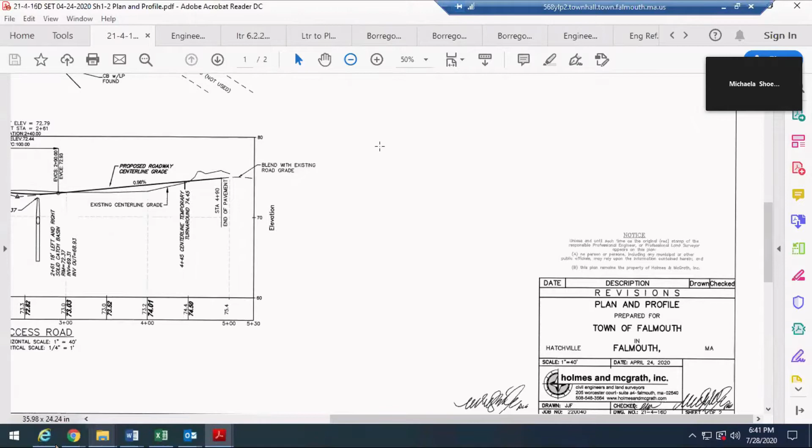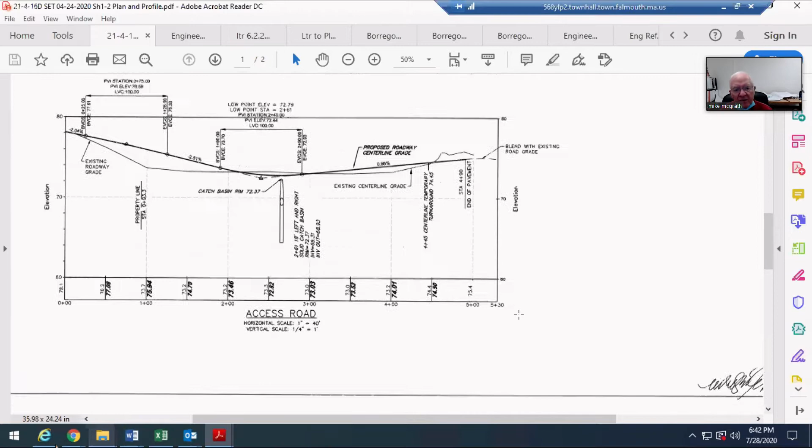What exists today is, I don't know if you can see my arrow, but the pavement of Locustfield Road actually is on the westerly portion of the layout in front of this site. Since this is an active sand and gravel pit, there are 10-wheelers and trailer dumps that travel up and down this road. There is an existing paved entrance that goes in a ways. And what this plan shows, if we get down to the profile, we're showing that if you look, there's a property line and there's an existing roadway that's been there for, I don't know, since the mid 80s.

But we've agreed to remove and dispose of that pavement, and this heavy line is the new proposed pavement that's going to be constructed on the road. There is going to be a low point that's shown where these two dark squares are, and there's a set of catch basins there that lead to a leaching basin. The leaching basin sits in the midst of basically a man-made depression. We have filed with the planning board drainage calcs that show that the drainage system is sufficient.

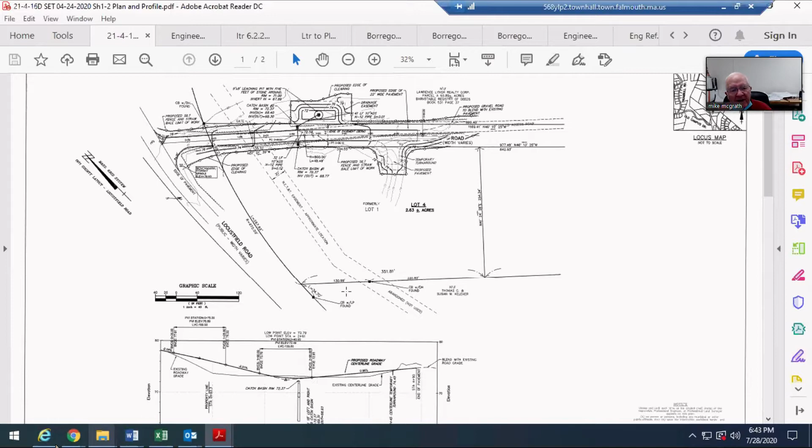The soils that exist there are obviously sand and gravel because it's been mined for, as I said, probably 40 years. So one of the things that has come up in the review, and we've already presented this one, but there turns out to be a legal problem with the previous hearing, was we asked for certain waivers. The first waiver we had was there's insufficient distance between this center line and the center line of where Locustfield Road comes in. The required distance is about 300 feet, and what there is, is about 100 feet.

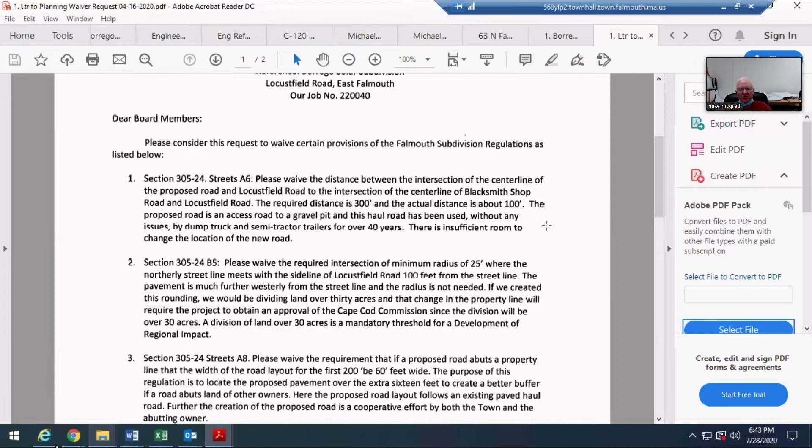And as I said, the project has been used without any accidents for over 40 years. It's been actively used as a haul road. So there's insufficient room to change the location of the road, so we asked the board to waive it.

Then what happens is if we go back to the subdivision plan, what we asked for was that we don't have the required sideline radius at the northerly side of the proposed road and the easterly sideline of Locustfield Road. Your subdivision regulations require a 20-foot rounding, 25-foot rounding.

One of the reasons we don't want to do that is if we touch or alter or divide any portion of this Lawrence Lynch Realty Corp land, we have to go to the Cape Cod Commission, and we don't want to do that. Obviously there's a public benefit here because if we construct the road, the town gets to use this road for whatever services they want on lots 4 and 5.

Then there's a regulation that says that if a road abuts someone else's land for the first 200 feet, it's supposed to be 60 foot wide, and then the pavement is supposed to be shifted over. We've asked you to waive that because this pavement already exists, and the reason is to allow a better buffer on the property line that is being shared. We don't need that because this paved road already exists.

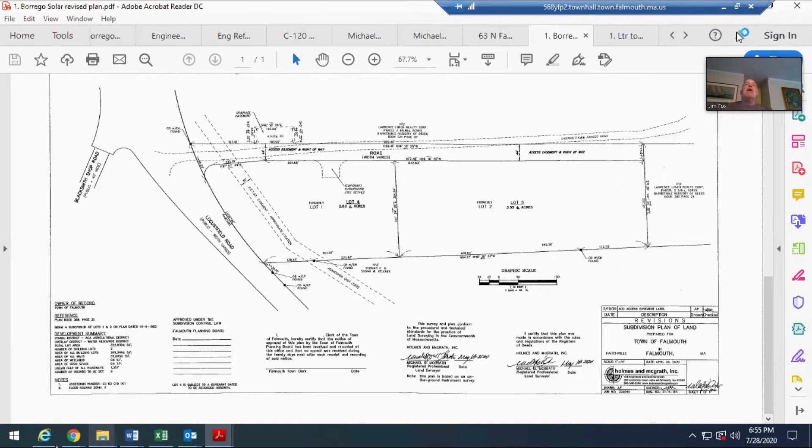So we could waive the utilities and not give them the right to put them in the air. I'm just afraid they could put telephone poles down the road because we've already given a waiver. It doesn't matter, if they don't need it, they shouldn't get it. It's the town of Falmouth's property. Any additional development that goes on the property following this driveway is in the town of Falmouth's hands. Okay, so they're not putting any utilities in. That's correct. Anybody else have any questions or comments?

Okay, I've got one, because I know I brought it up and I think there were a couple other people concerned, that there is a temporary turnaround. We wanted to know when that temporary turnaround would disappear.

Could I speak to that? The subdivision control law allows the temporary turnaround, and it says that if the road is extended, then the temporary turnaround can cease. But it seems to me that if the road is ever extended any distance, you would have to vote, as part of the approval of the extension, to abandon the temporary turnaround. So someday this road's going to be extended because of the potential for the town to develop lot 4 and 5, and I thought it was appropriate to label it temporary.

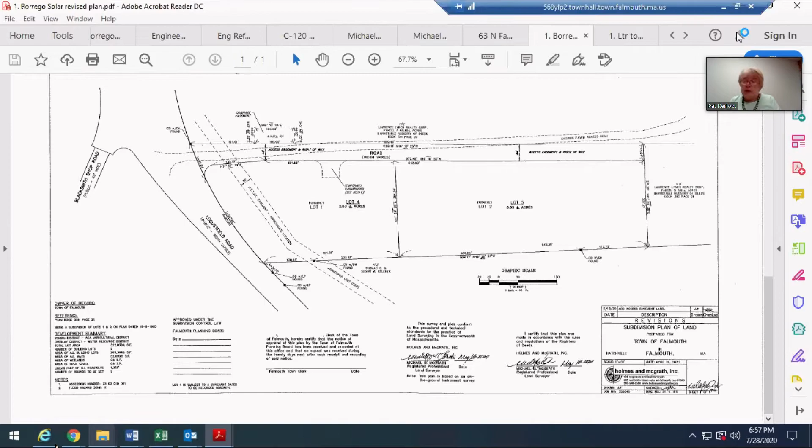Thank you, Paul. Anybody else? Okay, then I would need a motion to take this definitive plan for Borrego Solar under advisement. And we would then look towards Michaela's decision that she has begun to prepare, at our August 11th meeting, I believe.

Madam Chair, if I may, I thought I heard you say you wanted a motion to close the public hearing and advise the staff to produce a favorable recommendation for the subdivision. It sounds like that's what the board wants, yes. Very well, so if I could have a motion and a second, then we can have any discussion on that and vote.

So moved. Okay, is there a second? Second. It's been moved and seconded that we close the hearing on Borrego Solar, take it under advisement, and have Michaela complete a positive recommendation that we will see at the August 11th meeting, I believe.

And we're going to have that, correct, Tom? We will bring it up. Yes ma'am, and I just wanted to make sure we got a roll call vote on that, as we try to do. Yeah, we have to get a roll call. Thank you, I just repeated it so everybody would understand it. So may I have a roll call vote, please?

Jim, aye. Charlotte? Hold up your sign, Bob. Aye. Okay. John, aye. Pam, aye. Paul, aye. Okay, so it's 7 out of 7.

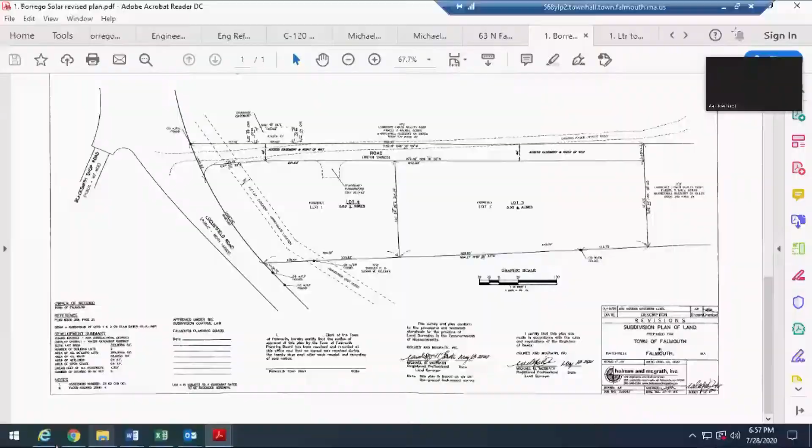Yes, he is. May we elevate him? Mr. Dinardo, if you would turn on your video, and I believe that Michaela has the plans and she'll be sharing the screen. Okay, and we need your sound also, Mr. Dinardo. And does everybody have the information in front of them? Good afternoon.

Has everybody on the board had ample time to review the changes that Mr. Dinardo has made to the plan? Yes. Yep. Okay, yes.

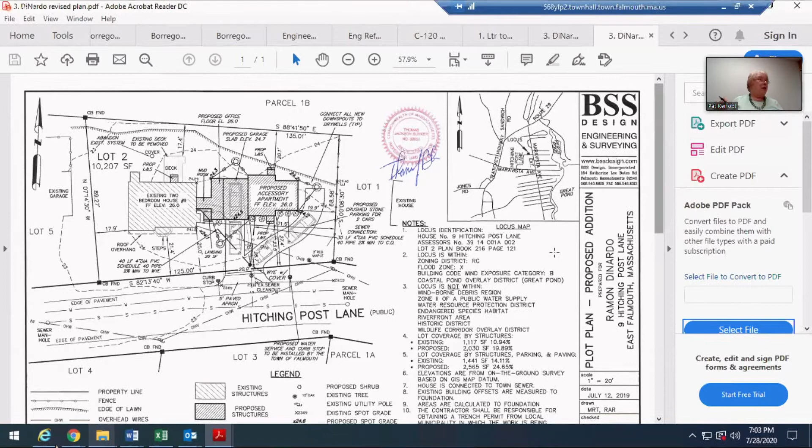And you can see the plan in front of us, and this is the changed plan. Does anybody have any questions or comments they wish to raise? If you wish to comment now, Mr. Dinardo, we'd be happy to hear you.

Thank you. I took into consideration all the comments from the planning board, and I think I've accomplished them. So I'll be happy to go through them if you have any questions.

Okay, Charlotte? I did have an opportunity to go through them, and it looks to me as if Mr. Dinardo has responded positively to our suggestions and comments, with maybe the exception of what Jim had to say, and the staff now says this is in compliance. So it looks good. Thank you, Mr. Dinardo. Anybody else on the board who has comments?

Yes, Bob. The engineering report, they seem to have met all of those with the exception of a few of the conditions. I suggest we honor those requests from the engineering referral. They're minor things.

That the construction of this project shall follow the attached soil erosion and sediment control standards, and that the applicant comply with the work as approved by the engineering division in the driveway permit. So they're requesting a driveway permit. The other one is about the house address. I just wanted to make sure those are part of the decision that we render, as conditions of the decision.

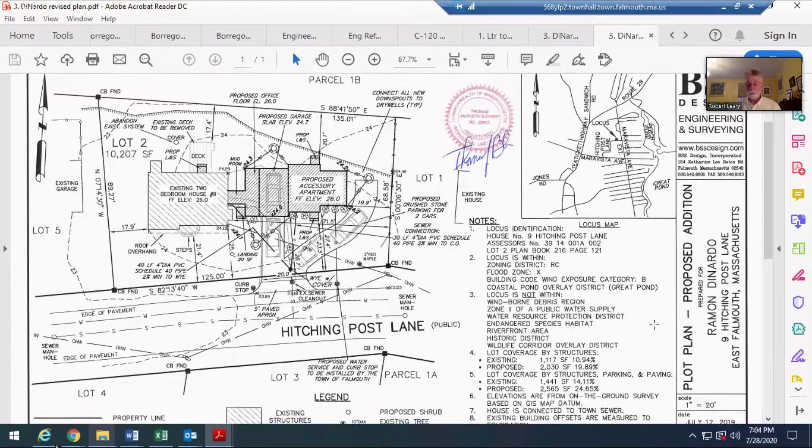Okay, anybody else? Yeah, I have a question. Jim, I hear you. Paul, were you first?

Yes, I have a comment. I visited the site today and looked at the plans and so forth. In addition to what Bob mentioned about the engineering report, I think it's a good location for this project. I think it's well done.

I know, I've got a bad internet. I was just telling Tom I have a bad internet connection, just like I do at home.

Oh, great. Okay, Pam, I think you wanted to say something? Yeah, since I was so adamantly opposed to the layout, the changes are terrific. I really appreciate your taking the time to make those adjustments to the plan, and I think it now serves exactly what we wanted in town. So thank you very much. Well, thank you. I think it does make an improvement, so I appreciate it.

Bob? I think it was exceptionally helpful that he sent us pictures of the other houses in the neighborhood, because it does fit with the character of the neighborhood. So that was very helpful. Yeah, I thought so as well.

Is there anyone else on the board who wishes to make any comments? Yes, I've been trying to make a comment. Jim? Okay, do we have a proposed elevation or a rendering of what this is going to look like?

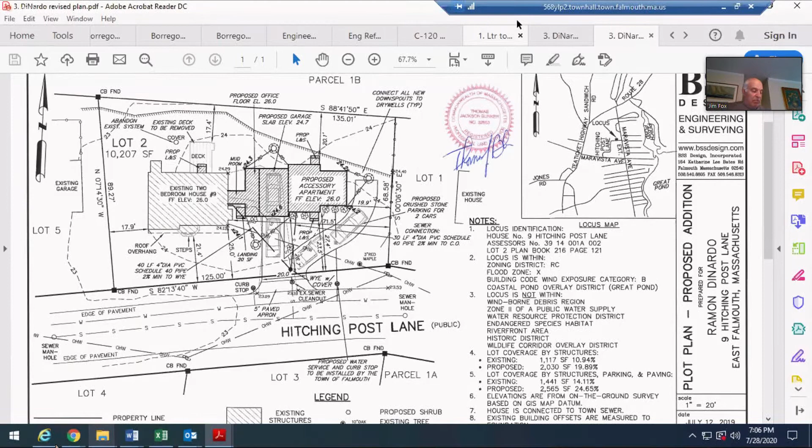Yes, we do. The elevations are indicated by Tom Bunker of BSS. Could we show it on the screen? I think the elevations are shown on the plot plan. I'm just wondering if we could show the public what we're talking about. It's Michaela's screen, maybe Michaela could do that.

Pay no attention to the man behind the curtain, but we're working on that for you. So give us a moment.

Basically the lot is flat, and the house and the addition are going to be on an equal level, with the garage slightly lowered. I would just like to see an elevation and a rendering of what it looks like from the street. I don't want to approve a building we don't look at.

Well, you know, we do have those sent in, Jim, and we can make them available. Okay, well, there they are. Why can't we show that now and talk about it? Because that's not changed, that's the same one.

Well, I'm not sure I'm understanding. The building hasn't changed, the only thing is... It doesn't match the site plan we just saw. There's a driveway in a different place. Yes, the driveway is in a modified area.

The driveway has been changed. So do we have anything that shows that, except on a plan level? I'm trying to get a look - if I was standing in front of the street, what are we approving and what is it going to look like? You're not telling us or showing us.

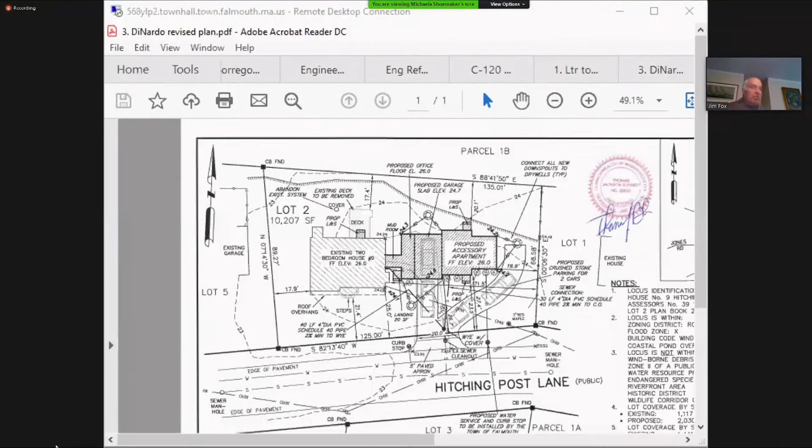I'm sorry, can we see that? Can that - you've got that, Jim. It's on the regular screen. I'm asking for the public to see it, not... I understand, this is a public meeting. I think if you see it on the screen, no one else can see it. Hey, there it is. Okay, it's on the screen now.

Okay, now talk about it, Pam, I can follow you. So the slashed area that says proposed garage slab at elevation 24.7, and then it's got what looks like another car, not in the garage, but in a driveway, and then it's got the driveway that goes off to the right. So it looks to me like there could be 4 cars parked there. Is that correct? Yes, that's correct. So you'd have 1 car in a garage and 3 cars outside of the garage. That's correct. Okay, any other comments or questions?

Okay, then this being a site plan review, we don't need to close the discussion. I would need a motion - a positive motion that we're looking to have at our next meeting on August 11th. So moved. Is there a second? Second. Okay, it's been moved and seconded. And all in favor - except I've got the screen sharing in front, so I have no idea. I only see 3 of us.

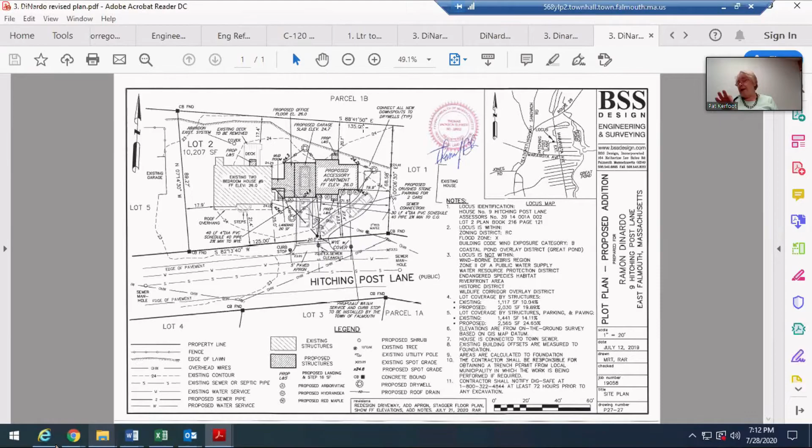Okay, Jim? All right. Charlotte, yes. Bob, aye. Pam, aye. Paul, aye. John, aye. And I'm in favor of it too. Thank you so much for your responsiveness, Mr. Dinardo, and we will have a decision on August 11th for you. Thank you very much, have a good night. You too.

Next, the applicant is Jeffrey Bright, site plan review application for a detached accessory apartment located at 32 Walker Street, Warwick and Associates. Tom, you had a comment? Yes ma'am, we've had a few emails with Mr. Bright and Mr. Ayers, the owner of the property. We talked to Mr. Ayers during the meeting, and we have an email from him that says: Hello Tom and the Falmouth Planning Board, at this time we would like to withdraw our application for the accessory apartment at 32 Walker Street. We will let you know our plans in the future. Thank you for taking the time to work with us. Regards, Hank Ayers. With that, I would encourage the board to take Mr. Ayers at his recommendation and accept his withdrawal, and we'll see a new application at some point in the future.

May I have a motion to accept the applicant's request to withdraw the application? So move. Second. Moved and seconded. Any discussion? All in favor? Jim, aye. Charlotte, aye. Bob, aye. Pam, aye. Paul, and John, I see your hand up, and I'm in favor of accepting it. Thank you. It's too bad. Okay.

It's probably appropriate for Beatrice to step up. Yes, there's a color plan. I'm happy to have her do so.

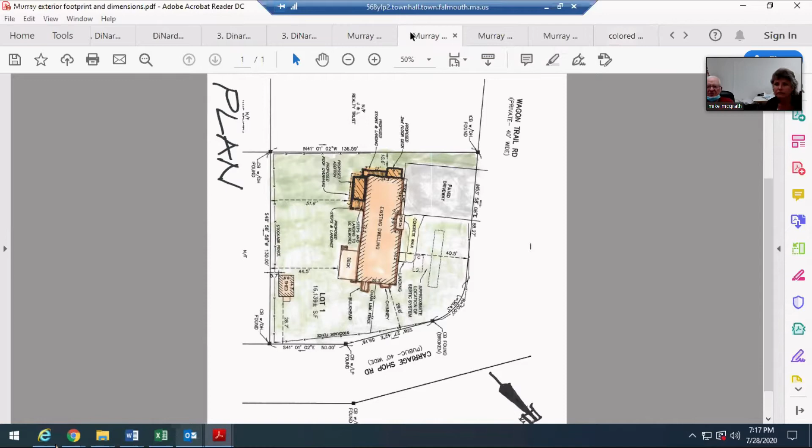Could you show us? Yes. My name is Beatrice Bunker. I'm the project architect, and I can briefly guide you through what we're actually doing. You see in front of you the existing condition, which is already set up pretty much for an accessory apartment, with the exception that there is currently no kitchenette.

The house is 72 feet long, and I gave you all the square footages before, but we have designed the additional — if you could please go to the next page. As you can see, we are adding an addition to the rear of the garage, which on the first floor, shown on the left side, is housing a pottery studio used by the owner, Valerie Brady. The pottery studio has a separate entrance from the backyard.

The entrance into the accessory unit is where it currently is, also from the back of the existing structure. An existing staircase leads you up to the second floor, and all that space — the sitting room, sleeping area, walk-in closet, a bathroom with laundry — is already existing. This window is already existing, facing the neighbor.

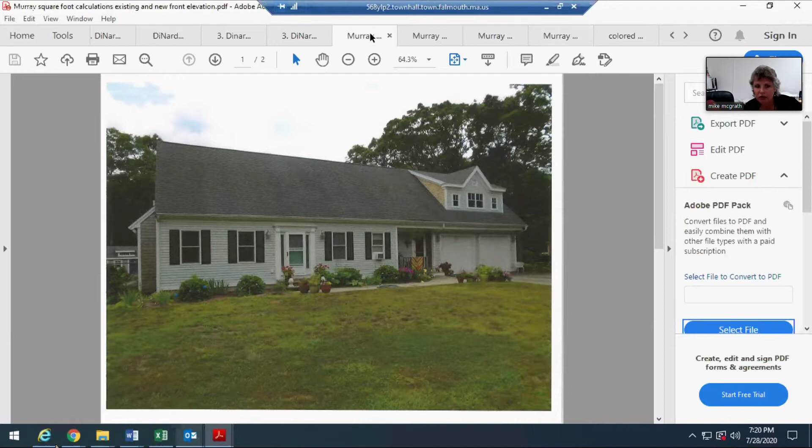The only modifications you will see for the whole project are an addition in the rear and the access stair and elevated deck facing the neighbor side. If you have any questions, I'm happy to answer. All the function on the first floor, the pottery studio, is completely part of the main dwelling use, for the main dwelling use.

Jim, I think this is a really great design. It definitely keeps the architectural effect of a single family home at heart, and the balance of the square footage by adding some more space to make it work. Obviously, the applicant had money to spend on design and engineering, and I think they did a really good job.

I don't think it matters, but where's the two means of egress? I know you're going to have a stairwell on the side, coming to a platform, but where's the other door to get into the place? Is it the back? It's in the back, yeah. Okay, I'm fine. I just didn't see a front door. Okay, that's what I thought. I'm good with it. It's great.

Anybody else have any questions? Yes, Charlotte? I don't have a question, I have a comment. Aside from it taking me a little while to figure out that back entrance, how that staircase worked, I think it's a good design, and it certainly fits all of our requirements. Well done.

Bob? Yeah, I just wanted to address the letter that we got and ask the question. On the back, it shows a large deck on the southeast corner of the building. Is that existing? Yes, we're not changing anything on the main dwelling. But does that deck exist now? Oh, yeah, yep. It's on the existing condition, on the drawings. Yes. Okay, because from the letter, I got the...

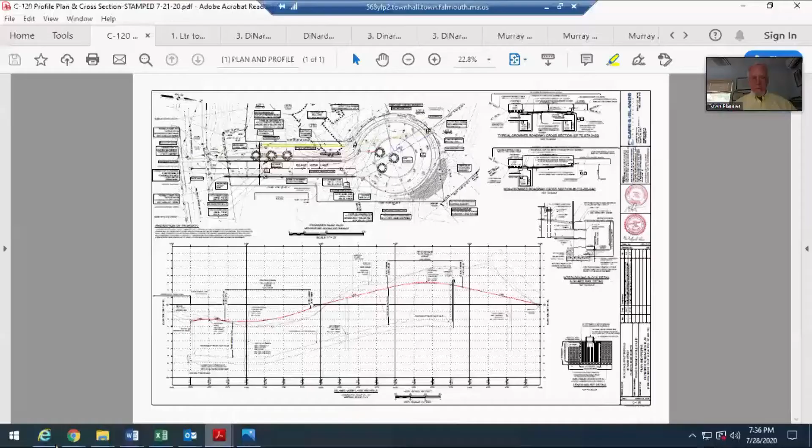Madam Chairman, somebody's chatting out of order here. What are you saying, Jim? I see chat screens coming up, comments from the audience, like they're not recognized, but they're talking to us, out of order. No Jim, it's the neighbor that we're talking about their comments right now. Oh, why don't we recognize them and listen to what they have to say instead of letting them just butt in whenever they want?

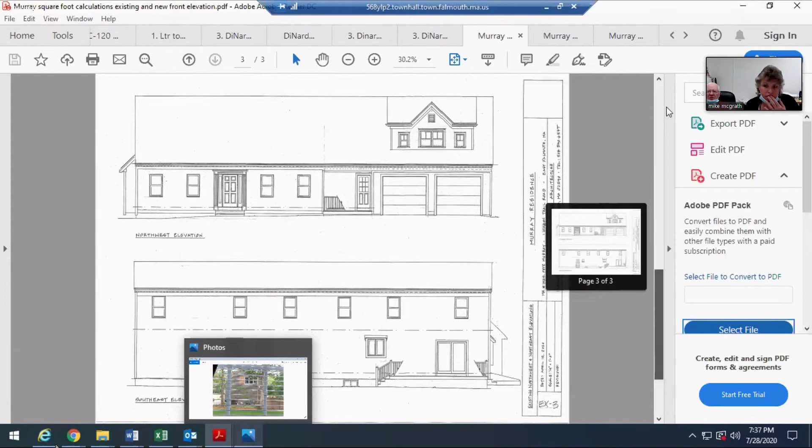And yes, would you please show the drawing number A3, not existing 3? It's under architectural proposed. Yeah, then oh.

No, it's under architectural. These are all the square foot calculations.

Madam Chair? Pat, yes Charlotte. I wonder how much room is there between the end of the garage building and the lot line they share with the neighbors? Because the deck takes up 6 feet of it. So from the wall of the garage to the lot line has to be...

They have 10 feet. I looked at that, I think it's something like 10 feet. It must be more than 10 feet if they can put a deck in there and still meet the setback requirement. Oh yeah, we do meet it from the deck, from the farthest out point.

And then the lot line is at a skewed angle, it's not parallel to the building. So it has to be 10 feet beyond the edge of the deck, right? That's correct.

So what I'd like to observe is that there's room for a walkway for a person to walk past the deck and around to get to the stairs, and still have at least 7 feet that could easily be planted with tall growing shrubs like arborvitae or cypress that you keep trimmed, which would be a softer, actually better looking screen.

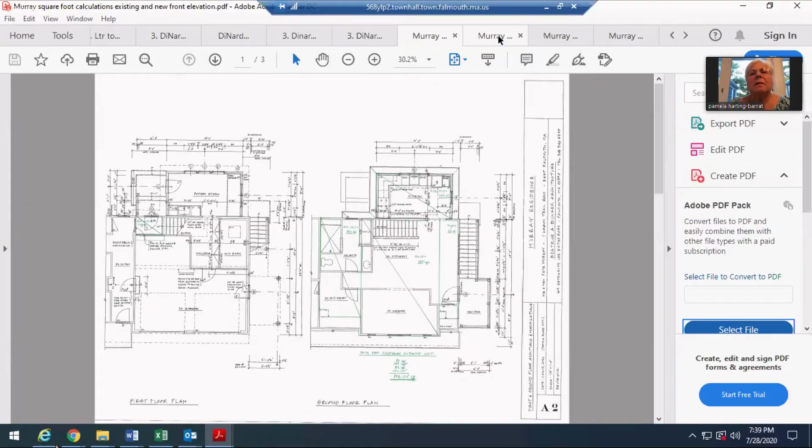Okay, does anybody else have any comments? Pam? I like the idea of the shrub, a fast-growing arborvitae, going up there to blunt that. Because 7 feet, even 10 feet, is a very minimal amount of space.

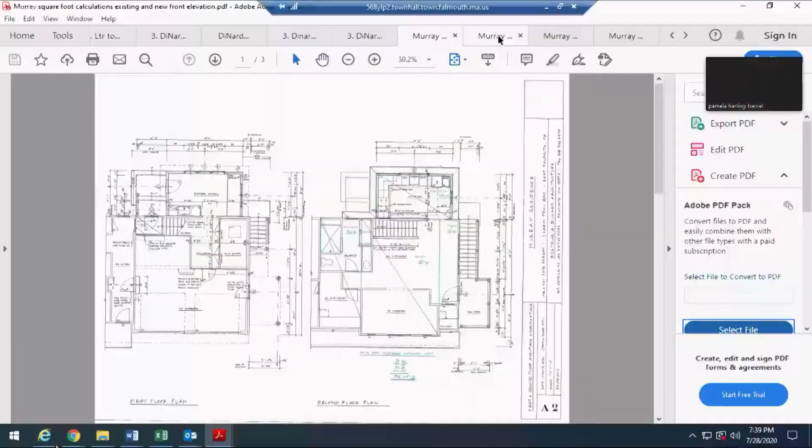And yes, that's what the zoning says, but if your deck -- you could say it's not a sitting deck or an entertaining deck, but it's large enough to have a couple of chairs and a small table out there. So it could in fact be... what did you say, Bob? You couldn't get in the door if you have anything on that deck.

Right, you know, I've done these before. My brother's house, we did the exact same thing as this. And to be honest with you, no one ever used it. It was done more for code than anything else.

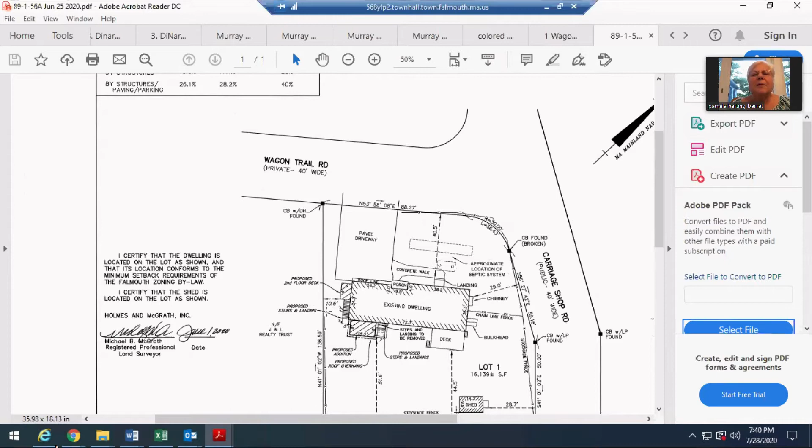Well, but the people who are there have a right to use it as they wish, and it will have traffic on it. But I think you could create the privacy that the neighbors very reasonably want by agreeing to plant some things that will grow much taller than a stockade fence. And much nicer looking as well. I agree with you.

And the deck is 6 feet by 9 feet, and there really isn't, as Bob pointed out, enough room to do anything there with the door there.

Okay, Jim? I like the landscaping approach. I live in a second floor apartment with one of these decks, it's how I get in and out all the time. You need a little space to get in your door when you're on the second floor. And it's a by-right, they can do it right now. I think a landscaping requirement is an excellent solution.

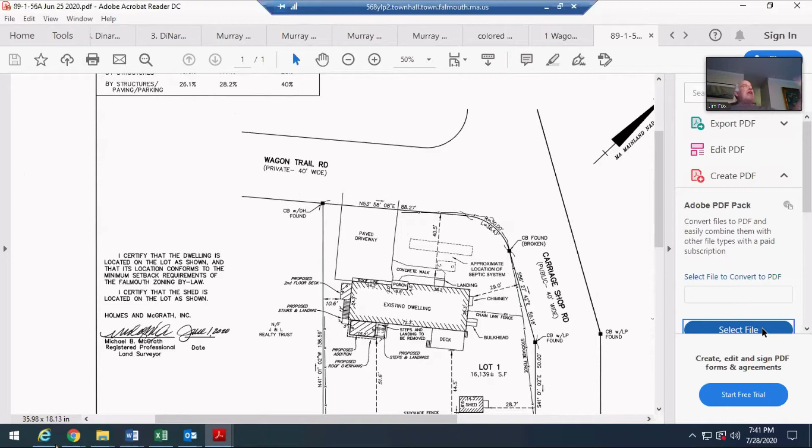I used Leyland cypress when I built mine 10 years ago, and I wish I didn't because they're huge, and you have to keep shearing them. Arborvitae is a great idea.

Are there any further comments? John? Yes, John? I think that there's already 3 windows existing on that side of the house that can look over the neighbor's yard or their deck or anything else. And this is just the second means of egress.

If they want to do some plantings, I think that's fine, but I'm not in support of making it a condition. I think this is a wonderful use of the property, exactly what we want with an accessory apartment. Currently, the person who's going to be using it is their daughter. I think it's being taken a little bit out of proportion here. I like the idea of it, but I don't want to make it a condition that they do planting.

I think it should be an agreement between the two, however they come to terms about it, whether it be a fence or the plantings, Pam, is what you're talking about. I think they should be the ones to make the determination. This really is not our purview to do because it's by right, but it would be nice if they came to some agreement.

Charlotte: I agree with John and with Pam, and particularly with Jim. It's a by-right thing. It didn't occur to me that it would be a condition. It's just trying to respond to the neighbor's reasonable concern.

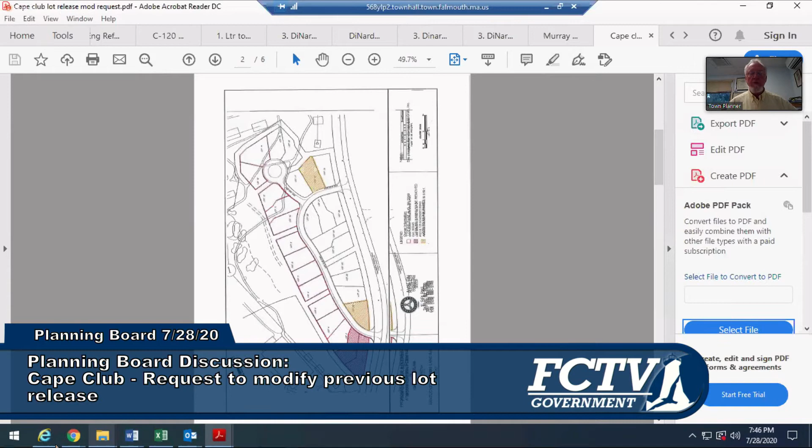There you can see the 2 that they would like to have released and the 2 that they would like to put back on hold. On a related note, we did meet out at the site last week and had extensive conversations about what they're going to be doing with the road and some of the deficiencies in the road — that's a discussion for another day.

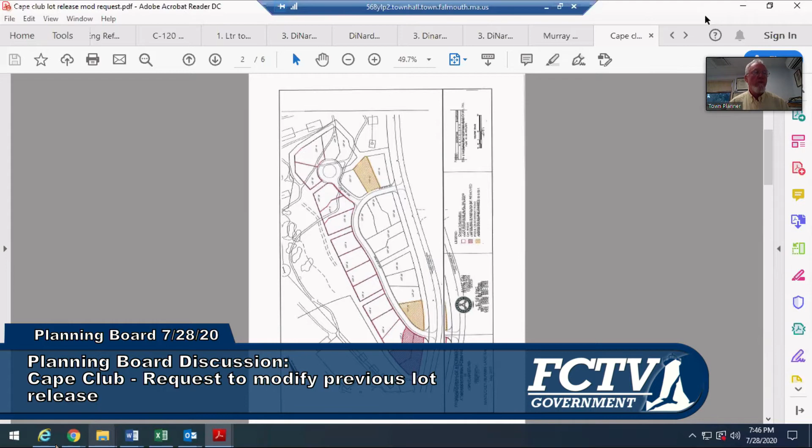But it's a straight up swap. I don't have an issue with it. I don't know that the board would either, provided we have the surety that reflects the proper numbered lots. And if you want to make a motion to such, we'll start the wheels in progress.

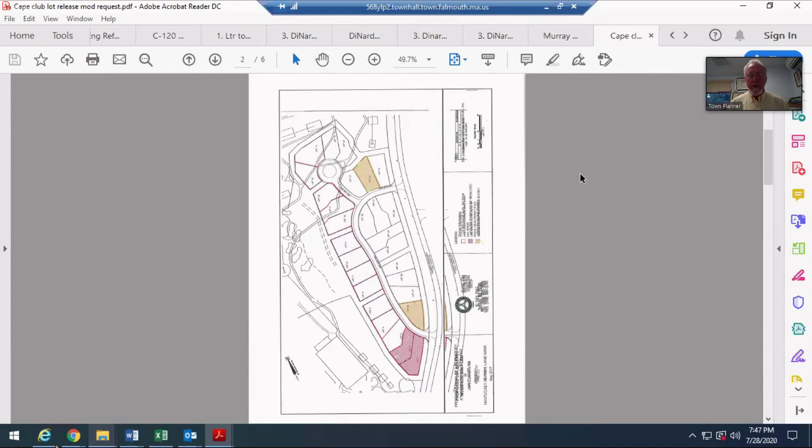Well Tom, there is a covenant that would have to be modified — how would that be done? Correct. So I believe in your packet you will see the lot release that essentially says we want to release, what is it, 18 and 28, and give back 1 and 2.

So scroll down one more if you would, Michaela. It's on the screen now. That's my markup, I think we got one more. Right, so essentially that lot release is going to show we're putting 2 back in and taking 2 out — an even swap.

Okay, but how is that covenant change accomplished, because it's been filed? So there'd be a second covenant that says we're releasing 18 and 28 from the covenant and putting 1 and 2 back into the covenant.

Okay, so it would be a second covenant, and at some point there'll be a third covenant that says we're releasing more, or we're taking more back. But that is the cleanest way to do it. The only concern I have is to make sure that the surety document reflects the lot numbers that are in that, and Kelly is working on that as well.

All right, when would we see this again, Tom? If the board votes it tonight, you won't. We would handle the paperwork here and sign off on it and have the covenant recorded. So it would be administrative. Correct. Bob, would you like me to make the motion?

Please. Okay, move that the board authorize a change to the covenant dated August 29th, 2019, placing lot 1 and 2 under the covenant and releasing lots 18 and 28 upon receipt of revised surety agreement for the subject lots. Second. Is there any further discussion of this?